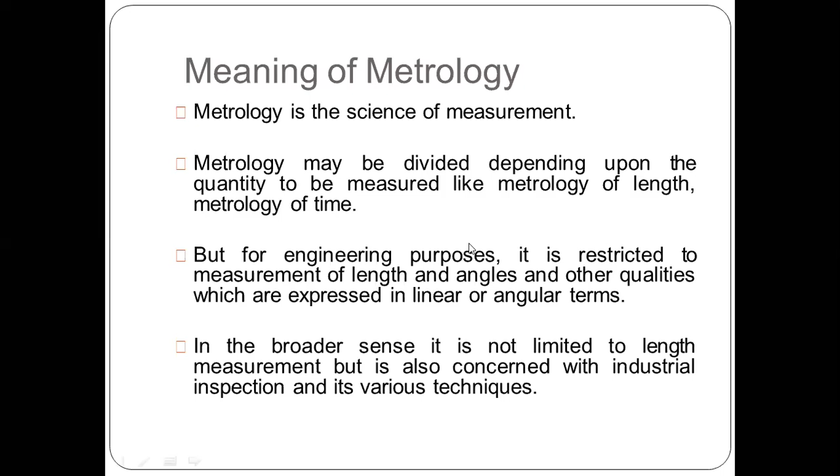Okay, so in the last lecture we have seen the elements of the necessity and importance of metrology, that is why we need to study this subject. So whatever we learned, we will discuss it again. For a design engineer, for a production engineer, for any case, we must have a knowledge of measurement. Why? Because not just a design engineer who is going to design instruments requires a knowledge of measurement. But in the role of production engineer, he must have a knowledge of measurement, because when he is going to produce a particular product, he must have a knowledge of measurement to decide the size of workpiece or raw material for the production of that material.

Okay, so for higher productivity and accuracy, we must have a knowledge of metrology. This part is already covered. I just remind you.

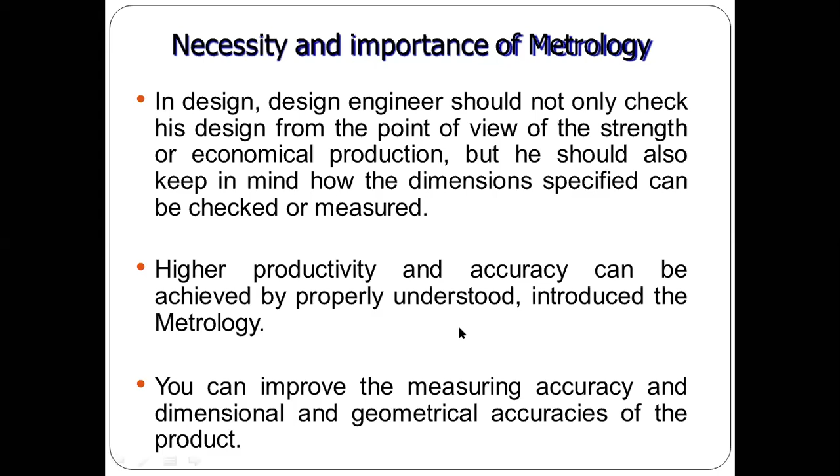Okay, so next we have seen quality control. The difference between metrology and quality control is that metrology basically deals with proper measurement. We have to measure the exact dimension of that particular object, and in case of quality control, we are going to just inspect that particular product and compare the value with the true value. So it will reduce our time and effort. For mass production, we are going to inspect the products only. We are not measuring each and every product, because if you are going to manufacture 2000 or 3000 pieces per shift, then it is not possible to measure each and every product. So in that case, we are going to inspect that particular product.

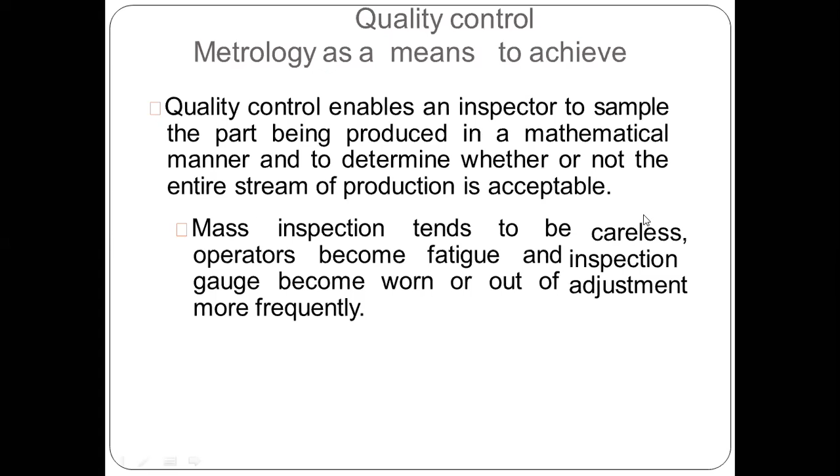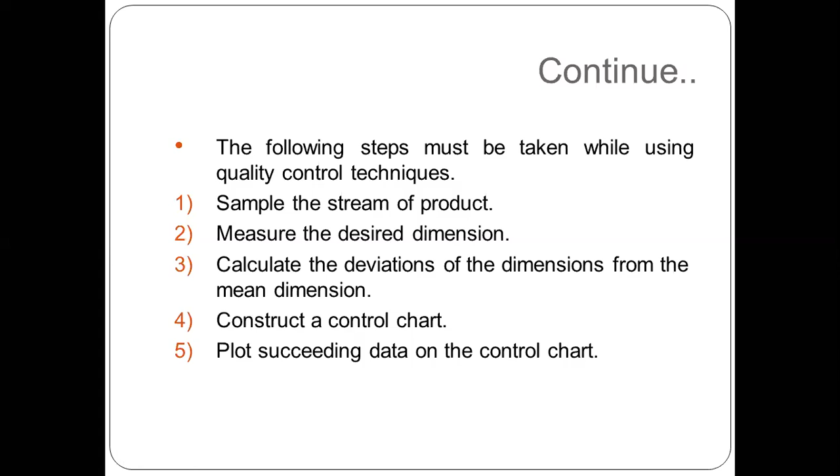Okay, next, we have already seen this 5-step method, how quality control is going to work. First we choose a sampling of that product, then we are going to measure the dimension, then we calculate the deviation of those particular dimensions, then we produce a control chart and put the data on that particular control chart, so we can identify how the control chart behaves. Okay, so these are the 5-step method of quality control.

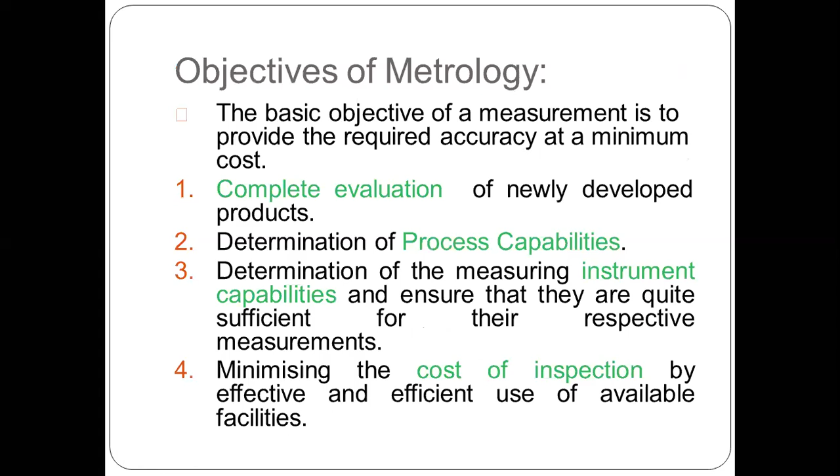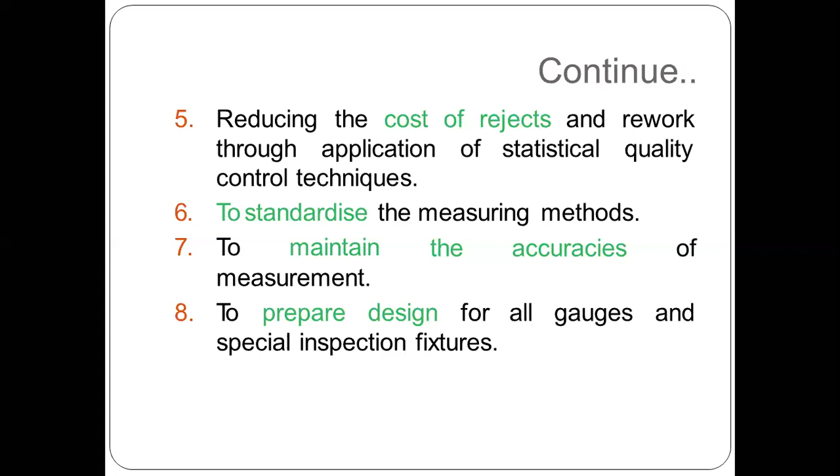These are the eight objectives of metrology, like complete evaluation, process capabilities, instrument capabilities, cost of inspection, cost of rejection, standardization, maintain accuracy, and prepare design. We already covered this part in the last lecture, but those who missed this part, I already provided yesterday's video lecture on your group, so you can view it there. Okay.

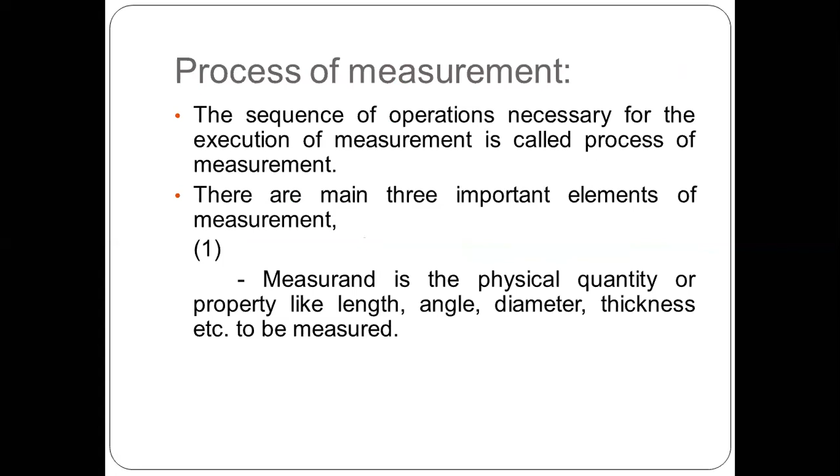Okay, this part is also covered in the last lecture, that is the main three elements of measurement: first is your measurand, second one is your reference, and third one is your comparator. And I have given you one example of measuring a simple MS plate, how we can measure a particular object with the help of the elements like reference, comparator, and measurand. So in the case of MS plate measurement, the MS plate is a measurand. The height or length of the MS plate is a measurand value. For reference, we are using a steel rule. And third one is your comparator, that is your eyes. You are going to compare the length of that particular MS plate with the ruler, so you can identify or visualize the value of that particular object. Okay.

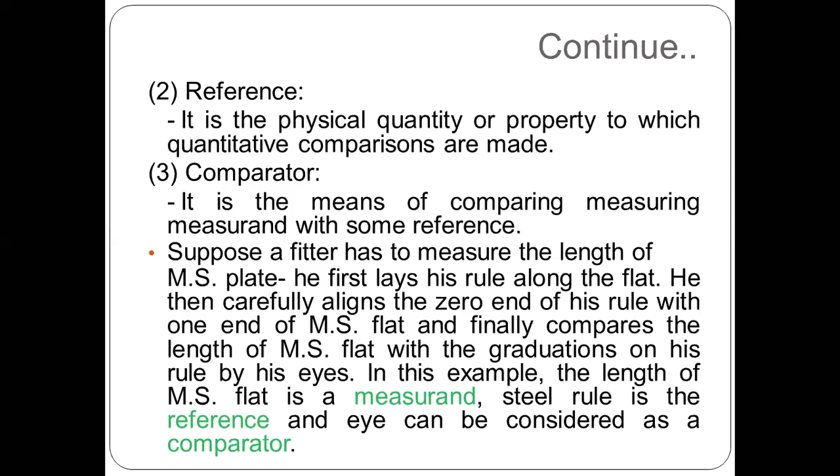So today we are discussing the methods of measurement. There are basically two different methods of measurement. First is your direct method and second one is your indirect method. So what is the difference between direct method and indirect method? See, in direct method, each and every part is going to be measured with the help of some proper...

Okay. Okay. ठीक है. Share screen.

There is some network issue.

There are two methods: first is your direct method, and second is your indirect method.

In direct method, we use some devices like scales, vernier calipers, micrometer, screw gauge, and bevel protractor.

For example, if you have to measure a diameter of a product, suppose you are producing a shaft and you are going to measure it with the help of direct method, then we use vernier calipers and micrometers. By using this, we can measure the diameter.

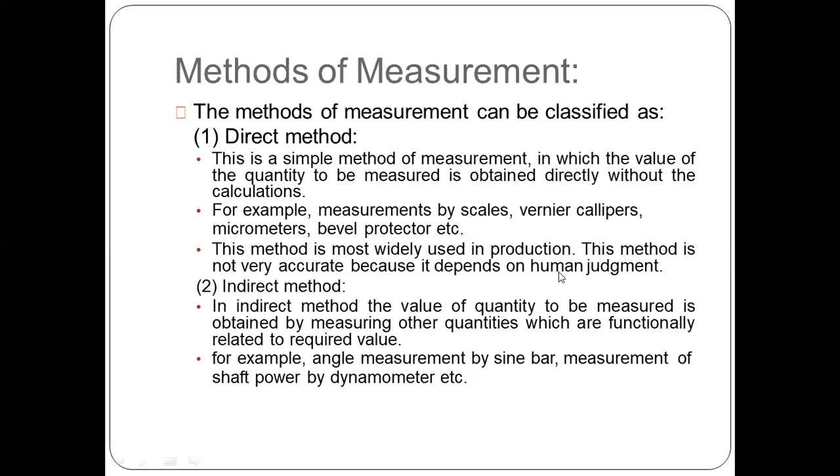The next topic is measuring system. Like measurement, there are three elements of measurement: measurand, comparator, and reference.

In measuring system, there are five elements: first is your standard, second one is your workpiece, third one is your instrument, fourth one is your person, and fifth one is your environment.

In measuring system, there are five elements. First is your standard, second one is your workpiece, third one is your instrument, fourth one is a person, and fifth one is the environment. These are the basic five elements required for the measuring system.

Suppose you have to measure the length of a bolt and the diameter of that particular bolt. Then in that case, how does this five element system work?

First is your standard. If we have to measure the length and diameter of that particular bolt, then we have some basic standards or ISO standard. The value with which we are going to compare should be the standard value. So standard is a first priority requirement for the measuring system. The most basic element of measurement is standard, without which no measurement is possible.

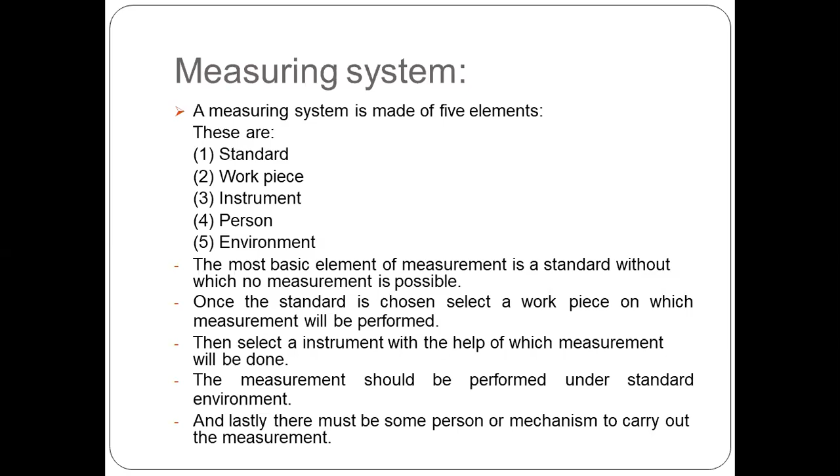So these are the five elements of measuring systems, and precision.

So what is the difference between accuracy and precision? See, suppose we are going to manufacture a shaft of 200 diameter and length of 20.

If we manufacture 10 shafts, then we measure the value of that manufactured shaft. We got readings like 199.98 mm, 199.99 mm, 200.1 mm, 200.2 mm. So we are getting results very close to that particular true value we are going to manufacture, which is 200 diameter. So these values are very close to 200, but not the exact value.

In every production, we are not getting the exact value. There are many reasons behind that, which we will discuss when we talk about quality control and how to maintain the quality of that particular product.

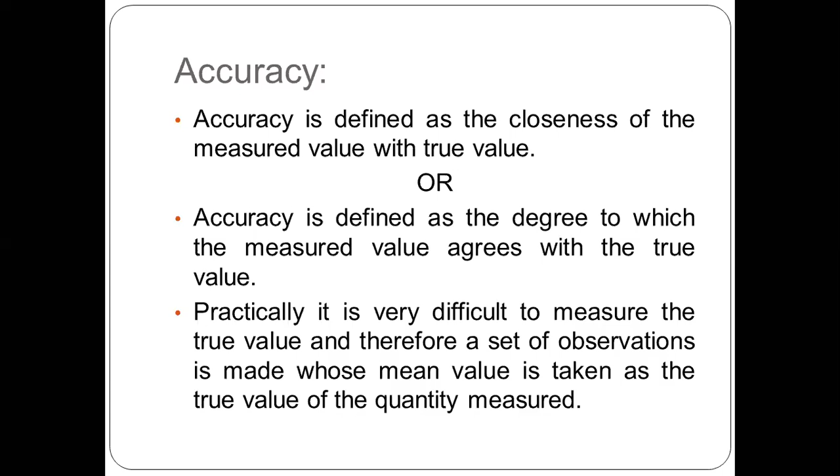That is accuracy. And what is precision? In case of precision, if we are measuring 10 different diameters, then we find values like 199.98, 199.981, 199.982. So this value has a large difference from the true value, but the values we are getting are very close to 199.98.

So precision means the value is going to be repeated in a large content. It is not very close to the true value, but it is repeated continuously. So that is precision. In precision we get values that are repeated in nature, and in accuracy we get values that are closer to the true value. So this is the basic difference between accuracy and precision.